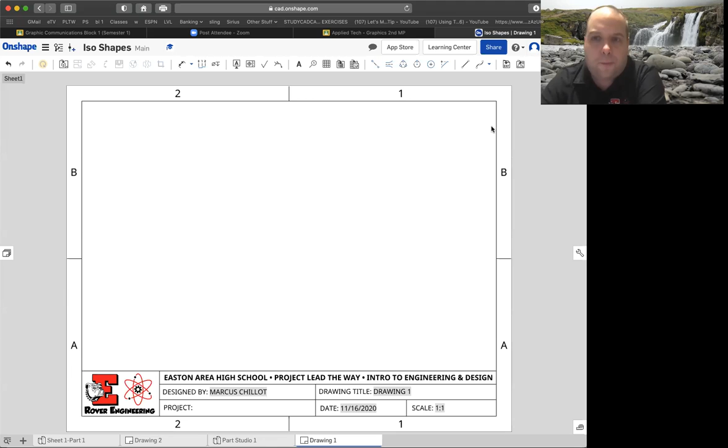All right. So let me share out my screen. We'll take a look at OnShape. And make this a little bigger. All right. Here we go. So first thing we want to do is bring our part in. So you're going to get your drawing sheet going, and then we're going to go up to insert, and we're going to bring in our part.

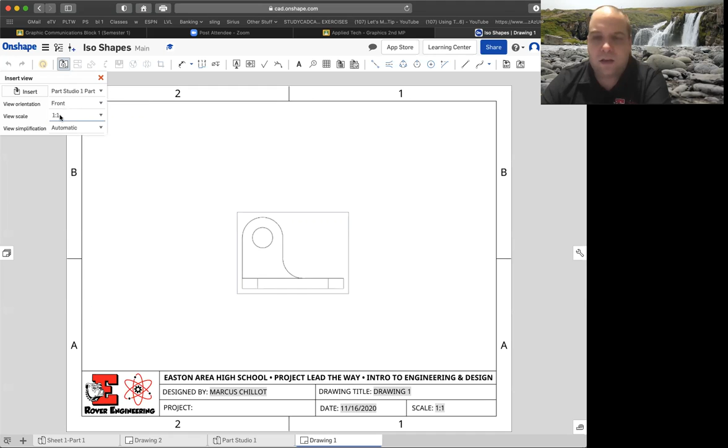All right, so I am going to be dimensioning this particular shape. When you bring it in, you want to make sure that up top here, you have it set to the front view, and it's going to be 1:1. So 1:1 will fit on the page. 2:1 is gigantic and will not fit on our 8.5 by 11 piece of paper. So I'm going to go ahead and bring this in.

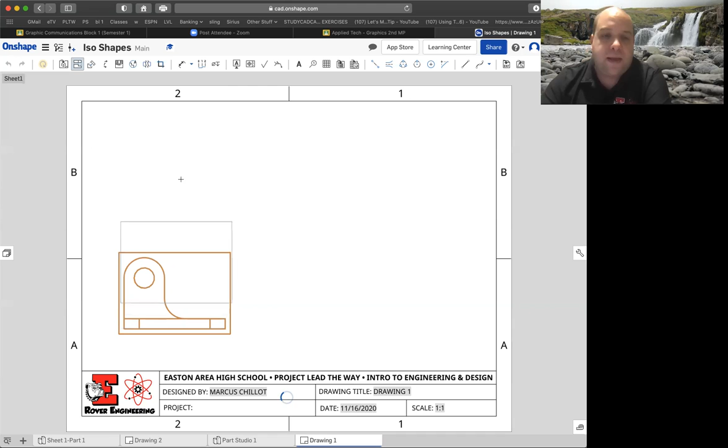And when I drop this in, you'll notice that I'm about an inch over and an inch up from the corner. Now, once that first view is there, it's going to ask you, do you want to project off of that? So we're going to use that information and we'll come up top and we'll put our top view. And then you mouse over this again, click on it and slide out here. Now we can get our right side view.

And then we can come back over to that front view and click it again and drag up here to the corner. That's going to give us our nice isometric up here in the corner. So that's what we need. So far, so good. When you bring this in, this doesn't have to be colored in. If you would like it to be, right click on it and you could shade it in. But it doesn't have to be. You can leave it black and white.

So looking at the drawing, the first thing I want to do before I forget, and we learned this on the last project, you have to turn on the hidden lines. Right now, we're not seeing any hidden lines on our drawing. We want to make sure we turn those on. So to turn on those, currently I'm still on the project tool. The project tool is when you click on the front view and then you can bring a different view over. We got to get out of that.

So if you press the escape key on your keyboard, that turns off the active tool. So that's not what I'm using anymore. And now I can, over top of the drawing, right click on it and choose show hidden lines. And I'm going to do that on all three views. And now that I've done that, we can see the holes on the bottom here. We have our holes coming through in each of our views. So we need that.

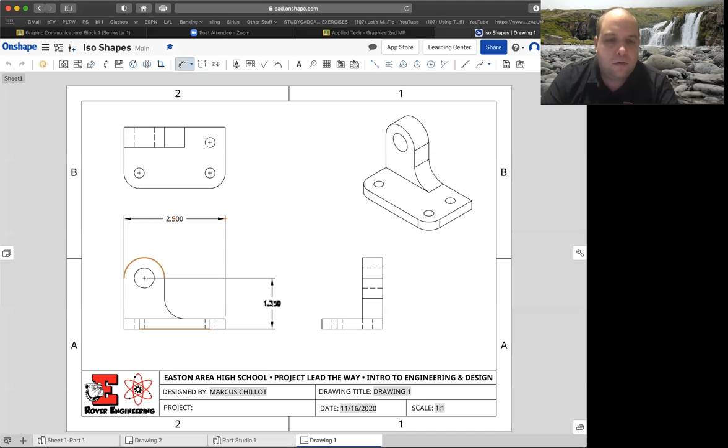So if I dimension from the base up to the top there, notice it's using the center mark, okay? It's not using the top of the circle, and I will explain why in just a minute. So I'll drag that over, and that's going to be my overall dimension, okay? But it's not my overall, okay? It's only up to the center mark, and we'll talk about that in just a second, all right? So keep that in mind.

All right, and then we need to know the depth. So the depth could be from here to this side, or it could be from here up to there. Well, with everything that we have going on with these circles, I'm going to do that over here, okay? Keep it away from that. So I'm going to come over and dimension from side to side, drop that right in the middle. Now, as I drag this up, okay, you could see that it snaps over there with the 2.5. Okay, so your overall, I'm going to make sure I have these two in alignment with one another, because they're both overalls, so they should be even.

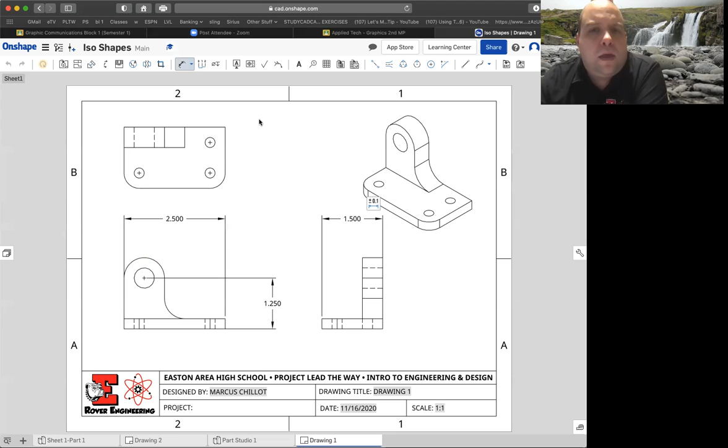Okay, so now at this point, we're finished with that. We can now put some other dimensions on our drawing. I want to focus on our front view first, all right? So as we're dealing with the front view, we have dimensions selected, okay? There's a lot of different dimensions that we have to put on this, all right?

Let's get this line right here. We can pull that out, okay, up to there. That's good, all right? So we went from the base up to here, and then we went from the base up to the center mark. We never dimensioned this arc, so we do need to dimension the arc. We can click on that, and with this, you have freedom of where you want to put this.

You'll remember one of our guidelines is that we cannot cross lines, so you don't want the leader line there to cross through the overall of the 2.5. See how they're crossing there? So you have the freedom to put this anywhere you want within here. Okay, I'm going to sneak this up here in the corner where it's kind of out of the way. Okay, so we'll put that right there. So the radius of this is 0.5.

Okay. We also have this circle here. So we need to dimension this circle. Well, when we go to do that, we can pull that and put that right up in here where we have room. Okay. I could slide it over here. I kind of like this. So when I'm doing this, I'm trying to get these kind of in alignment close to one another.

All right. And then this coming over here to this point here, we don't have this dimension. Okay. Well, what did we forget? Well, we need a center mark on that. We need to know where that arc goes to. Okay. So you got to have that center mark on your drawing, just like it was on the original on the sheet. Okay. So again, we come in, we can put some more dimensions on this and can dimension that 0.5 there. Try and put them in alignment with one another. Those are looking good.

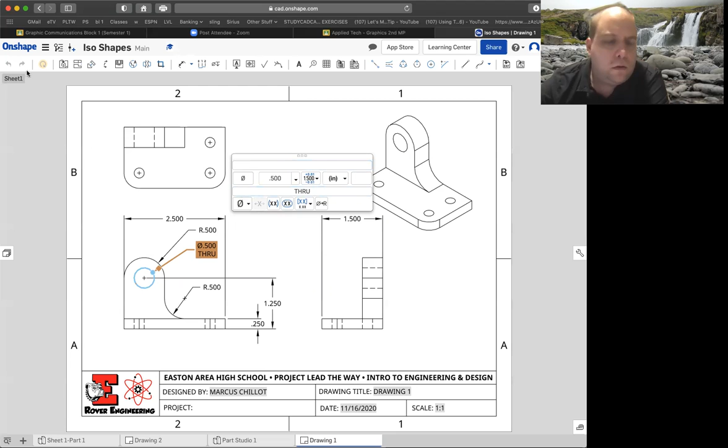We can hit enter. Oh, it went away. No, it wanted to put an extra line. How do we get rid of it? Press escape. Yeah. So to get rid of it, you just press the escape key and it will get rid of it for us. So let's take a look. What do we got?

And you can always make adjustments after the fact. You can come in and move these arrows if they're too crowded. You can move them around. So if you're not particularly happy with where it landed, you can always make those adjustments after. As long as these leader lines here don't cross, you're in good shape. I kind of put all of these right in a row. Looks nice and clean. I would say our front view at this point is done. We do not need to worry about our front view anymore.

We can shift over to our right side view. So I'll turn on dimension and we need to put some dimensions on here. So from here to here, that's a dimension that we're going to need. Drop that right there, 0.5. Height dimensions are already taken care of for us. If we look over here to this side, we know what the overall height is from the information on this drawing. We don't need to do the overall height. We don't need to go from here to here because we already did that over here in this drawing. So really, that's all we can put on that one.

Let's shift our focus up here to the top view, because we got a lot going on. Let's talk about it. Well, we already know the depth dimension, and we also know from here to here from this information that we put over on our right side view. And we already know our overall width. And we know from here to there how long that dimension is, because we know that that's 0.5. So we know that from here to here is going to be 1.5 based off of our dimensions. So that's not something we need.

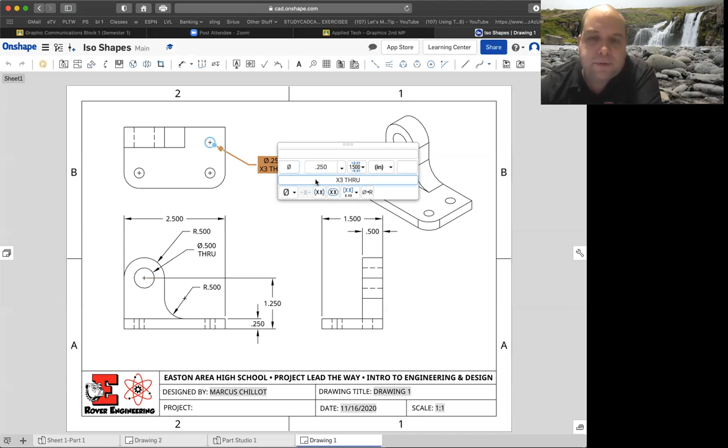Well, these holes go all the way through, okay? So when we look here, those holes go all the way through the shape. We're seeing that here and here, all right? So we have to modify this again. We'll come up, and where I wrote X3, I'll just put a space and type in THRU, okay? All caps when you're dimensioning. Don't type in lowercase, all right?

So it is a 0.25 dimension circle, and that is a through hole. It goes all the way through the shape, okay? Perfect, looking good, all right? Now, we also have these radiuses here, okay? So we can go ahead and throw a dimension on that, okay?

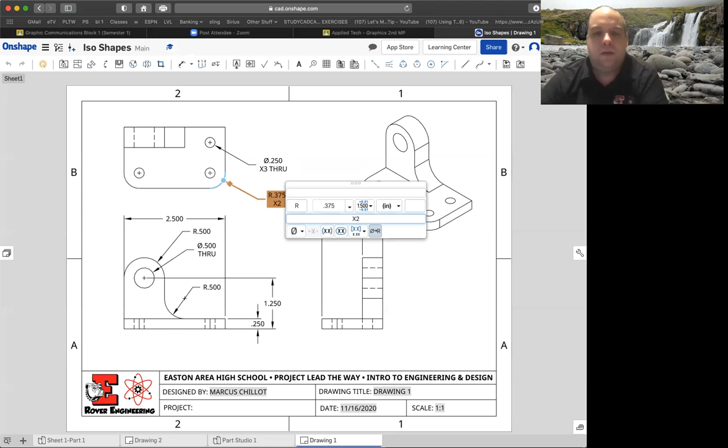We pull that out, and there's 2 of them. It's the same dimension, so I'll type 2, all right? So there we go. Both of our arcs here and here are dimensioned, okay? We dimensioned all of our holes, all right? Everything at this point is done, okay? Everything's done. The only thing that's not is we have to have our center lines.

So at the top here, when I come up to the top, it says 2-point center lines, all right? And what that'll let me do is when I come over here, I can click and click, and it'll put the center line in, okay? We have our center mark, okay, which is the plus sign in the center of our circle.

But to indicate the center of that going through our shape, you'll remember back when we learned multi-view drawings, we talked about center lines. Okay, so we got to have our center lines on here. And if we come over here, this one also needs a center line. I don't know if it's going to do it on this one.

No, it didn't, unfortunately. Okay, so this particular drawing, the way that OnShape works is when this drawing arcs and comes over where this arc stops, it creates this line here. And this line is equal with the center line. So you'll see when I drew that center line there, it didn't necessarily show up. So that's unfortunate. We can delete that line.

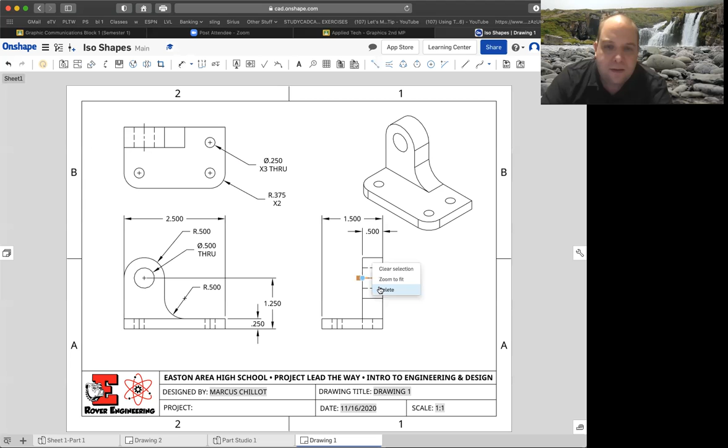All right. So you're not going to be able to put a center line on this particular drawing because it's exactly the same. But I will tell you, it's not always going to be like that. You're not always going to have this imaginary line that OnShape decides they want to put there for you that's going to be blocking your center line. So anytime you have a circle, follow it across, make sure you put the center line.

All right. Now that's also happening down here. Okay. Now this would need 2 center lines here and here. All right. But on our front view over here, we have those same 2 lines. So it's not going to let me draw them there. But on our right side view, okay, this arc comes over and this line blocks where the center line would be. But you'll notice over here, it doesn't have one. So you have that opportunity to come in and put that center line in.

So we'll come over and I'll click there, and I'll click there, and it puts the center line in for us. Okay. Unfortunately, there's no way to turn these particular type of lines off. So it's blocking where our center lines would have been. You just got to go with it. Okay. That's just the way that the program is set up, and there's no way for us to change it.

All right. So here is a difficult drawing that I did not put a whole lot of dimensions on, and the whole thing is fully dimensioned. So when you are dimensioning your two drawings, okay, let me take a look here at the sheet. So I asked you guys to dimension number 11 and number 16, okay? Be careful, okay? Don't put too many dimensions on it. Don't over dimension it, okay?

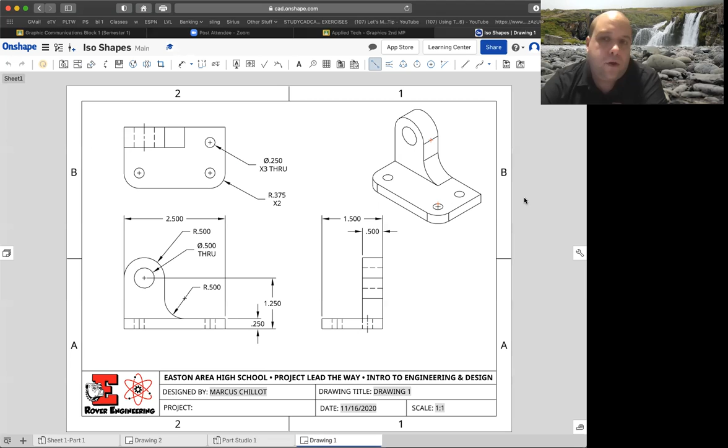Make sure you're putting those center marks. Make sure you're putting, if it's a through hole, that it's a through hole, that it goes all the way through the shape, okay? Don't forget your center lines. It's a lot of good information in this video. And even though this isn't one you're particularly dimensioning, because I didn't want to do the exact one you were, this one is very similar, okay?

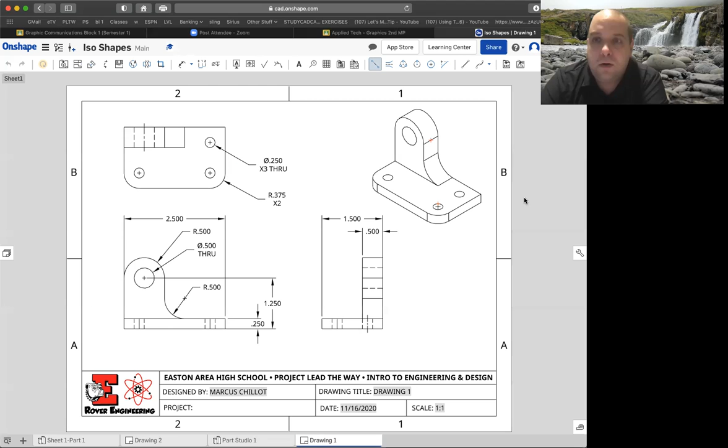Number 15 and 16 are very similar. So this is 15. You don't have to do this one. And you're going to be doing number 16. So they're very similar. Please use the same process when you're going through. If you have already started doing this, I would watch this video and then go back and modify and make changes after you're done watching it.